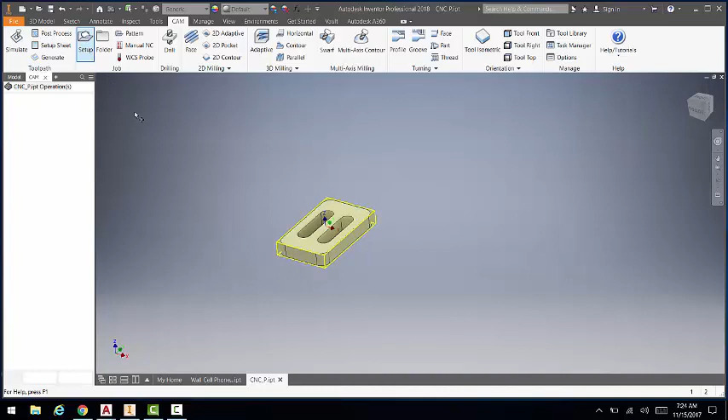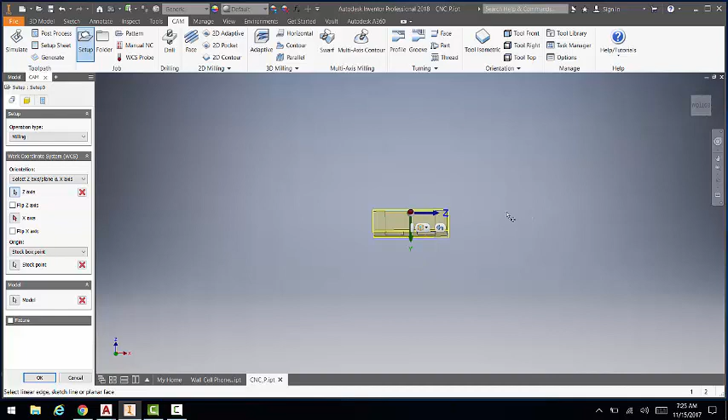Now, a critical part of this operation is that the way we CNC stuff, the bit is coming down from this orientation, so your Z-axis has to be pointing up. If your Z-axis for some reason is not pointing up like this, as you can see, now it's expecting the bit to come in from this side right here, and that's just not the way we're going to set it up. So to do that, first you're going to go ahead and select where it says Model Orientation.

You're going to select either one of these Z-axis options, and you're going to select any vertical line on your part. If it's upside down for some reason, you can just click Flip Z-axis, and then you have it there.

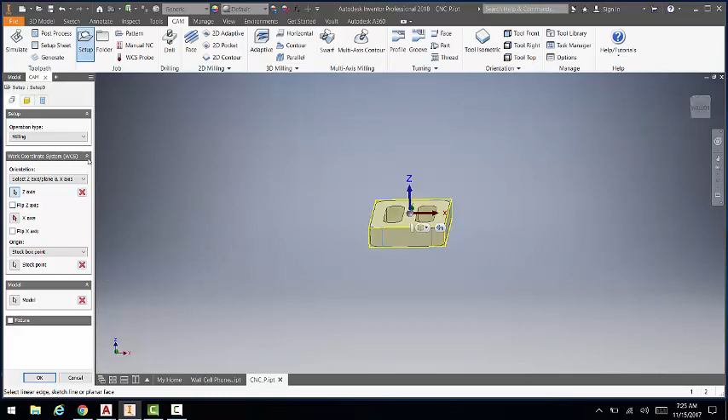In terms of the X and Y, it doesn't really matter in the computer. You just need to know what orientation your X and Y axis are so you know what orientation to put your stock into the machine. So for example, I'm going to put my piece of wood more portrait style as opposed to landscape style because of my X and Y axis orientation. My Y is going vertical, my X is going horizontal.

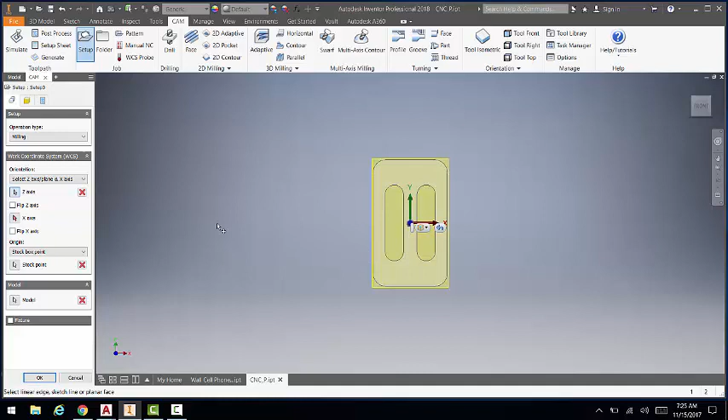Stock box point is our next thing. This is where you're going to tell the machine is 0, 0, 0. We're going to go ahead and choose - I always choose a corner, specifically a top corner. So this is where I'm going to tell the machine is 0, 0, 0, and then go ahead and mill from there.

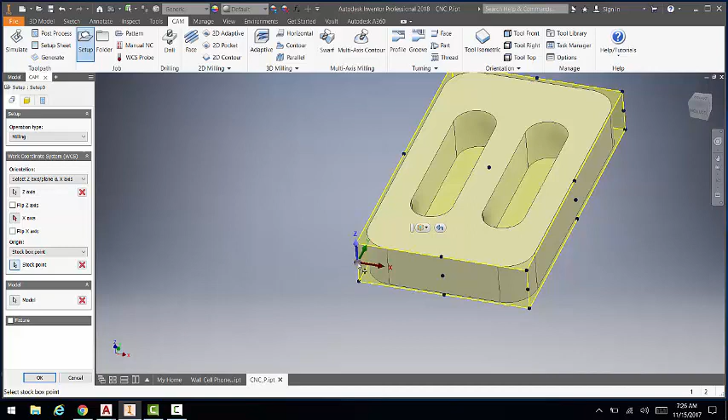Be careful you don't choose a midpoint. Sometimes it's hard to see, so you want to make sure you choose a top corner.

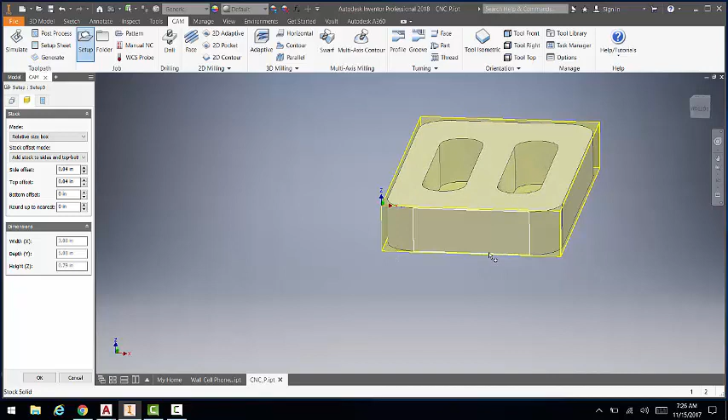Model should be selected already, so that should take care of that. Now we go over to the stock tab. We're going to do what's called a relative size box, so it's going to have a minimum stock around it. This yellow prism that you see here, that's the wood that you're putting in the machine, and this is what it's going to cut out.

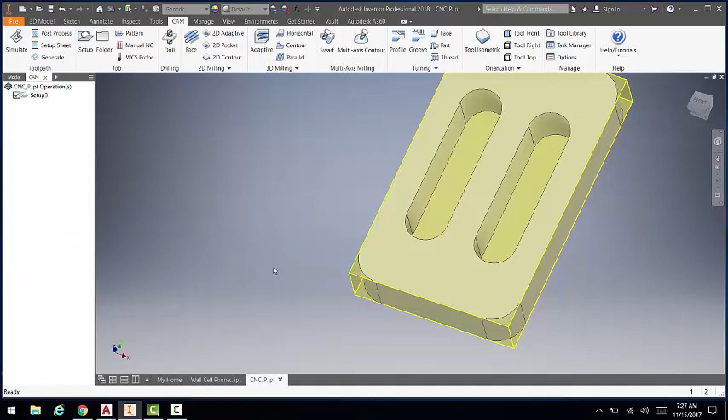We don't need any offsets, so I'm going to zero out all of those things. As you can see now, this representation of my stock is now the same size, minus some of the corners and stuff, as my model. Go ahead and click OK for that. So now what we've done is told the computer what size and orientation of the wood that we're putting into our machine.

The next setup is a pocket cut. We always want to cut out the pockets or the inside stuff before we do a contour or perimeter cut. If we did a perimeter cut first, this piece would already be loose inside the machine and there's nothing holding it down to do these pocket cuts. So in terms of orientation, our contour cut is always going to be last. I'll come up here to where it says 2D pocket.

Again, it's picking this as 0, 0, 0. The first thing I want to do is choose my tool.

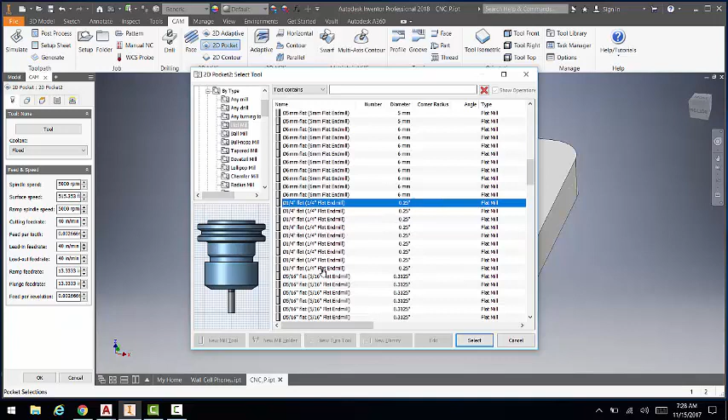I already had this set up, but we want to go ahead and choose a 1/4 inch flat. The easiest way to find this, because as you can see there's tons of different types of tools, is by type, then flat mill, and then you're going to scroll down until you find one of the many 1/4 inch flat mills. Just choose the top one, that would be fine - really any of them should do. There's very little difference in the different types of flat mills. So we'll go ahead and click select.

So now, as you can see, this is the profile of my cut. Now we got to do the feeds and speeds. Without getting too into this, the computer cannot regulate the spindle speed on our routers - that's actually done on the tool itself. In case you're curious, they're going to set it up so it's spinning about 25,000 RPMs. As you can see, that changes everything else that we have here.

What I want you guys to really worry about is the cutting feed rate, and some of these other options down here. The cutting feed rate is how fast our bit right here is moving through our stock. 60 inches per minute is pretty fast.

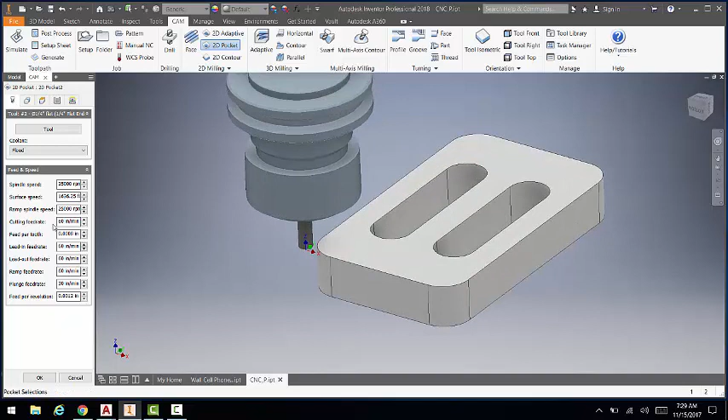We could probably get away with it with pine, but we're going to go ahead and turn that down to be safe, to 40 inches per minute. So it's going to move at 40 inches per minute across my stock as it's moving around. I want my lead-in to also be 40 inches per minute.

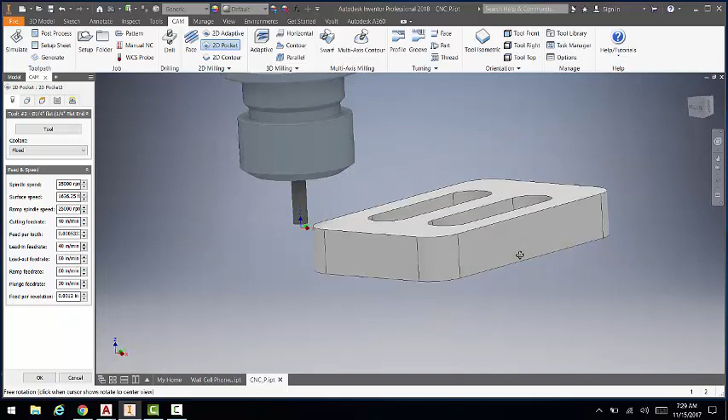If I was to show you a picture of this, my spindle is going to come down and feed in like that, then start moving around my stock. That lead-in is going to be 40 inches per minute, as well as it moving through my stock at 40 inches per minute.

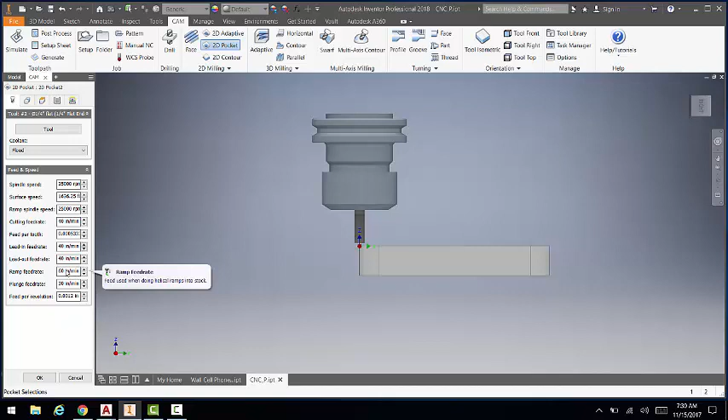Lead out is kind of negligible, but we'll keep it at 40. My ramp feed rate, you'll see this on our simulation, but this is when it starts to spin to cut out these slots. I'm going to take that all the way down to 20 inches per minute. And my plunge feed rate, although I'm not using a plunge on this operation, I'm going to change it to 15 inches per minute.

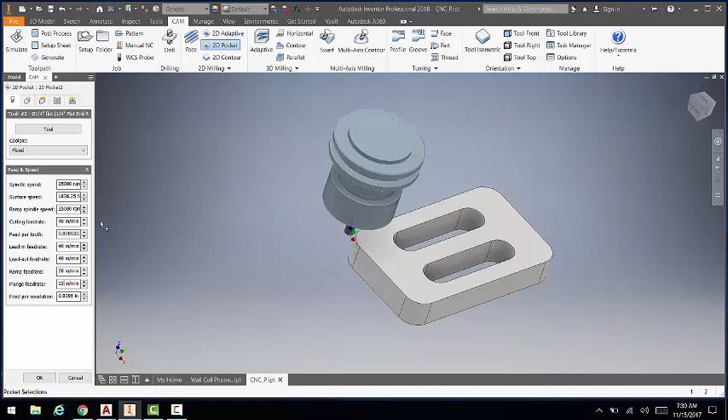All the other ones leave as the default. They're really not going to affect anything here, but you may want to write these values down for future reference. On to my next tab, geometry.

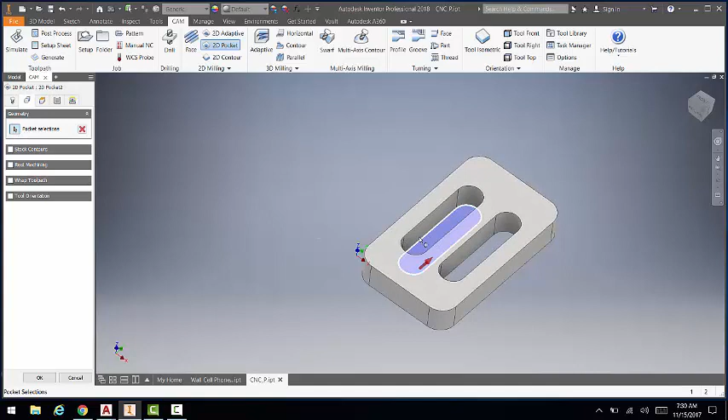So these are my pockets that I'm selecting. Since both of these pockets are of the same depth, I can go ahead and choose them both at the same time. Always choose the bottom edge of your pocket, and even your contour, always the bottom edge, and you'll see why that matters later. Also make sure that arrow is correct, since this is a pocket cut and I want to remove all the material inside of here. If the arrow is on the outside of your cut, just click on it to move it to the inside.

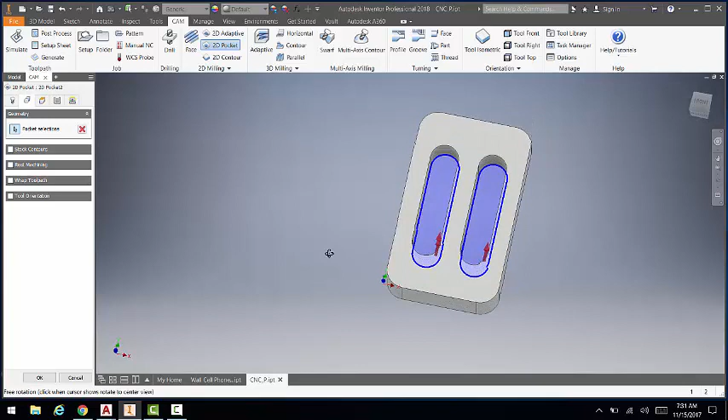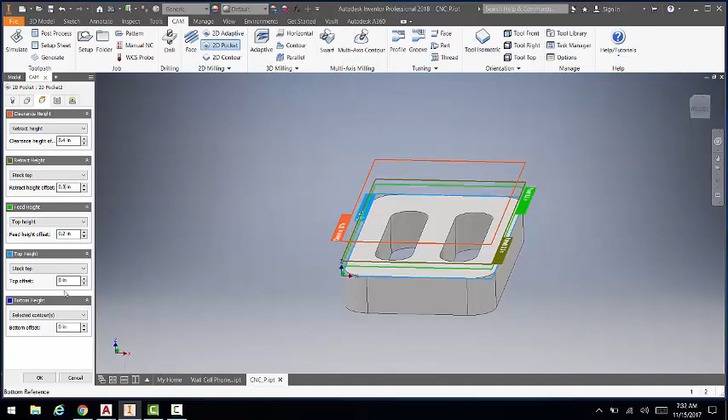We're going to adjust these a little to make sure we're safely moving through our part. My stock top, my retract height, I'm going to change to 0.3. My feed height I'll go ahead and leave at 0.2. My top height here for my stock top, this is where it thinks the top of my wood is in this case, so I'm going to change that to 0.1. That way my first cut just barely touches my part, so it's not diving into the part too hard.

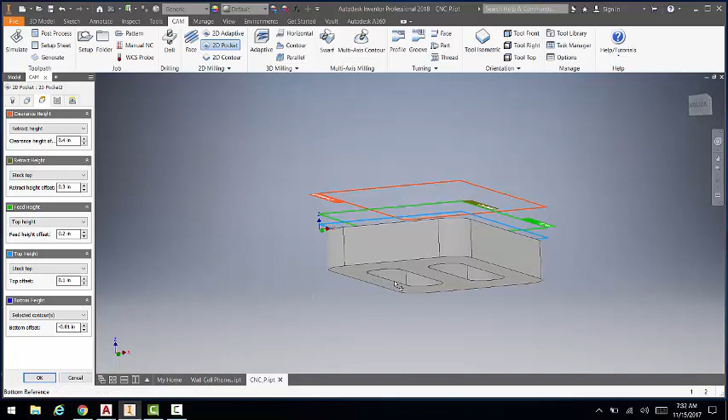And then my bottom, it says selected contours. If you remember back on the geometry, we selected the bottom edge, so it thinks that's our bottom, which is what we want. But just to make sure we get through the whole thing, we're going to put a negative 0.01 on there so that it cuts all the way down through the bottom to completely clear out our part.

Next tab, passes. A couple things here: uncheck stock to leave, since we don't want to leave any stock — we're going to machine it perfectly. Go ahead and check smoothing. If you look here, smoothing gives you a nice smooth arc when it comes around. I'll add a 0 to smoothing, and if you hover over here and read the box that shows up, it says to make smoothing and tolerance the same for the best operation, so let's add a 0 here as well.

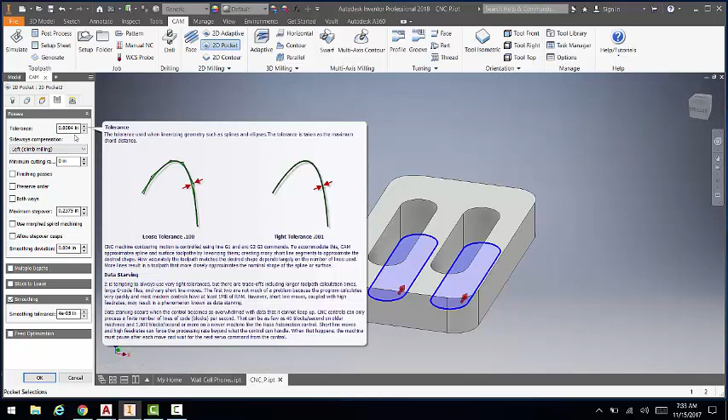Now, you need to have multiple depths. You don't want to plunge all the way into this and go around in one pass — you're going to incrementally take out wood. So I'm going to check multiple depths, and for us, our depth is going to be 0.1. So if this is 3/4 of an inch thick, it's going to take 7, or technically 8 passes to get all the way through, going down 0.1, 0.1, 0.1, and so forth until the very bottom, where it's going to take out 0.05 for multiple depths.

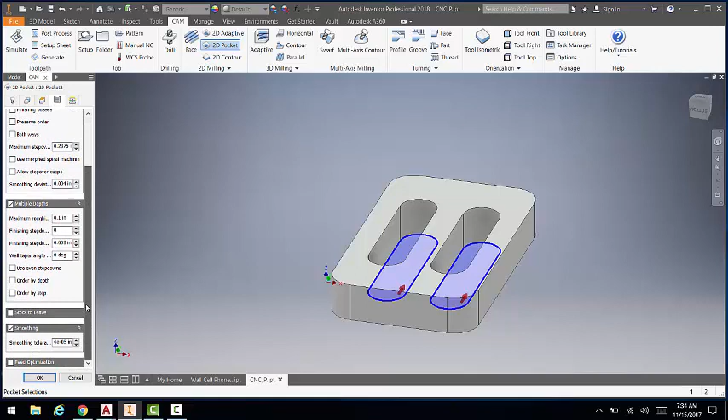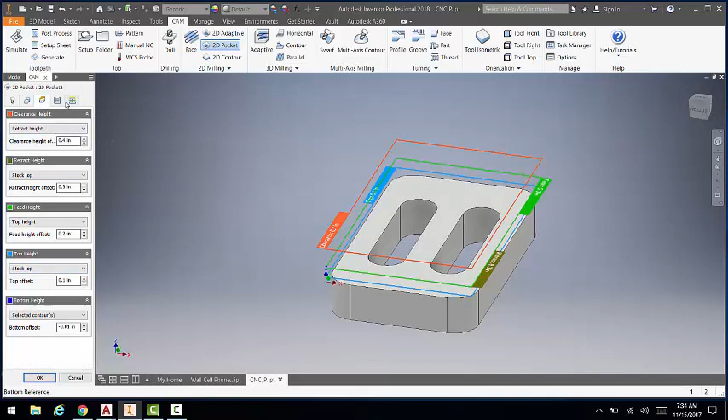Everything else we can leave the same. Let's go to our final tab here, and you want to uncheck keep tool down. This way, if we had that left checked, when it's finished cutting out this pocket and moves over to the next pocket, it would stay down and cut right across, cutting out your piece of wood in the middle. We want it to retract up to the heights we set previously, so it moves over to the next operation and starts everything there. All of this we can leave the same, and we'll go ahead and click OK.

As you can see, it's generating our toolpath. If you don't get a toolpath generated, you've made a mistake somewhere. If you look at this, it's going to start its plunge right here and then actually start cutting out. This is the feed rate shown here on these blue lines.

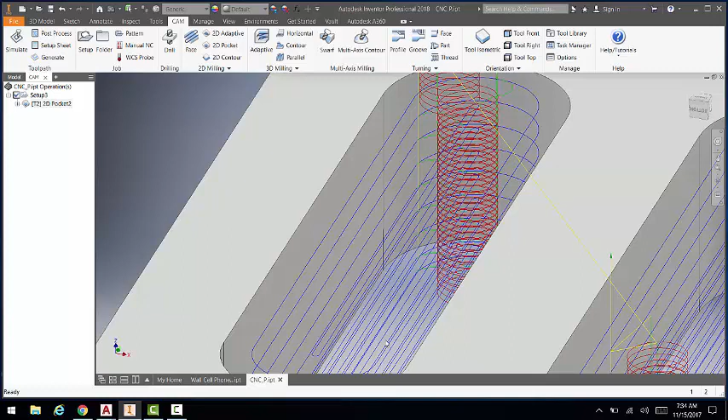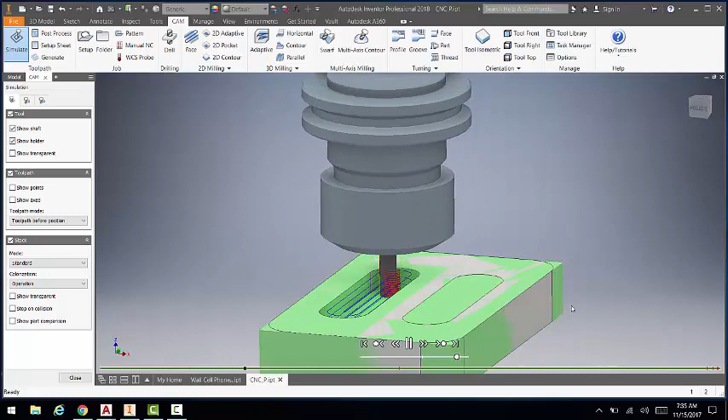I go ahead and right click and go to simulate, check the box that says stock, and go ahead and hit play, and you can actually simulate what this is going to do so you have an idea what you have going on here. By dragging this cursor, you can move it faster and actually see the stock going away.

Everything there looks good, about the way I want it. I'll go ahead and click close, and now I have to do my second operation, which is a 2D contour. Go ahead and select 2D contour.

The nice thing is all my feeds and speeds got saved. It just used the previous setting. This didn't though, so 25. Alright, now everything didn't get all changed. We'll go ahead and change this back to, this was 20. Oops. And this was 15. Alright, 40, 40, 40, 20, and 15.

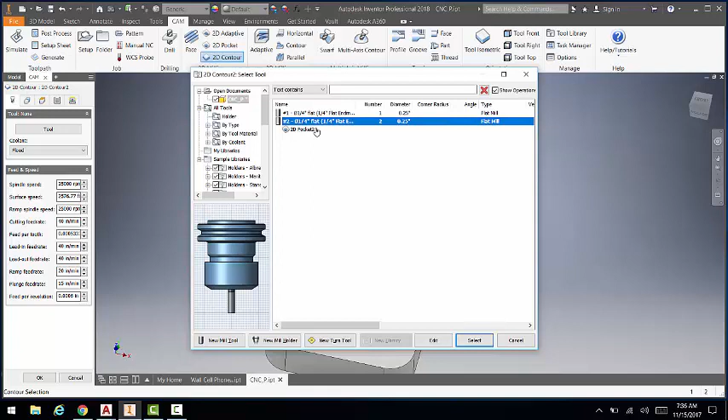Alright, my tool, I'm just going to choose my previously selected tool. I'm not changing the tool, so this is the tool that's used for the 2D pocket, so I'll go ahead and use it for this as well.

Next tab, geometry. Stock contours. Again, I want to click the bottom edge. I want to make sure that my arrow is on the outside of my part, so it's cutting it out. I don't want it to be on the inside of the part, outside.

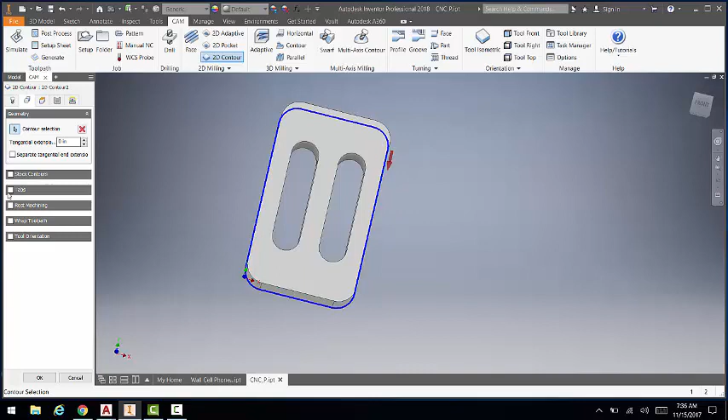Now, anytime you do a contour, you're going to cut it out, you need to have tabs. These are critical. As you can see in the picture here, it's going to leave these tabs in here so that it doesn't cut out your entire part, so that it's still holding down to the table.

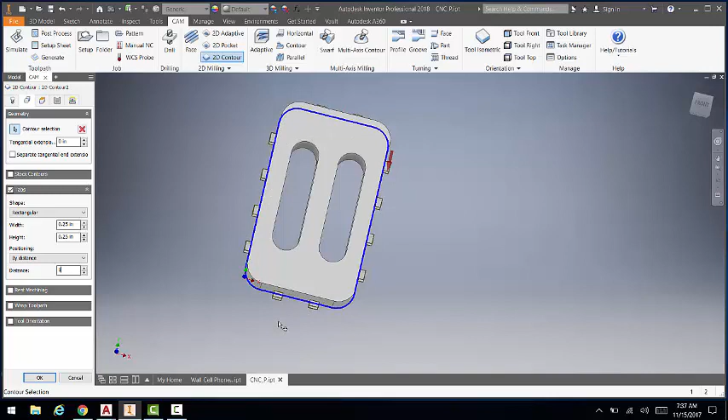That's a really thin tab of a 1/16 of an inch. I make them 0.25, and just for argument's sake, I'm going to go ahead and change the spacing to 1 so that I have more tabs going around. We'll take these off with a router. It's really easy, but you need to have tabs, and you want to make sure that you've changed the thickness of the tab so it's taller like that.

Going to my heights, again, just like my previous one, 0.3. Stock top, I'm going to go 0.1, and then bottom offset negative 0.01.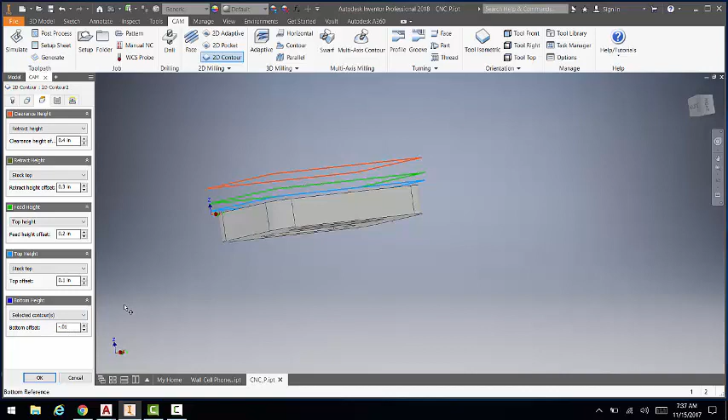Alright, passes again, make these the same, check smoothing. Oh, I can make that, okay, as long as they're the same, it's fine. That's probably a little too high. That's alright though.

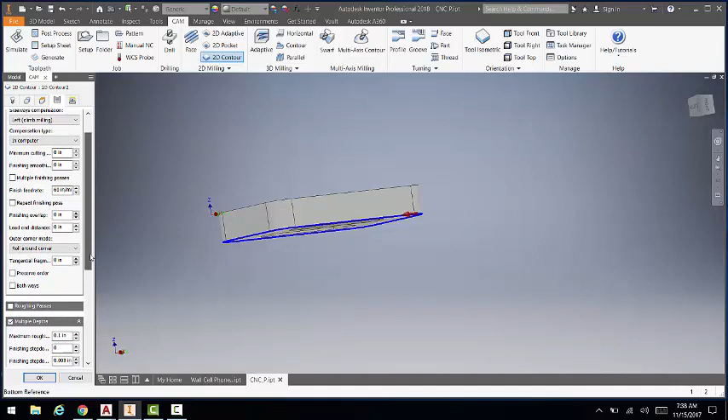Multiple depths, we always want to do multiple depths. Change this to 0.1. Everything else looks good. Final tab, again, make sure keep tool down is unchecked. Click OK.

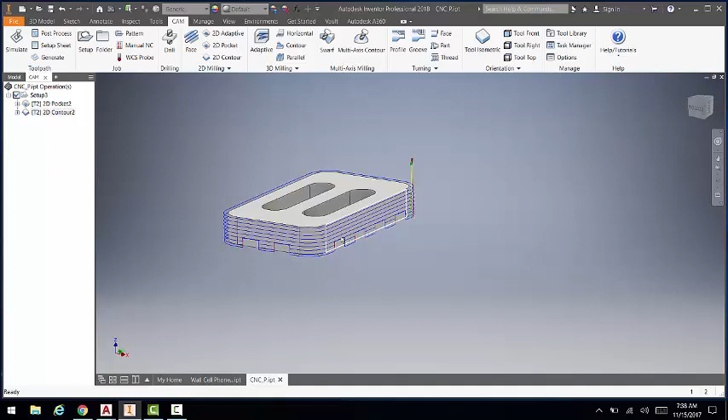So as you can see here, it's going to come around here, it's going to lift up and not cut out stock right through here. Alright, we're going to cut that out on the router later after it's all said and done.

I'll right click on it and go to simulate. I'll make sure the stock is checked. I'll go ahead and click play, and I'll move it down, and I'll show you. So if you see here, the router bit's actually picking up and not cutting out these tabs, and we're going to remove them on a different tool after the fact.

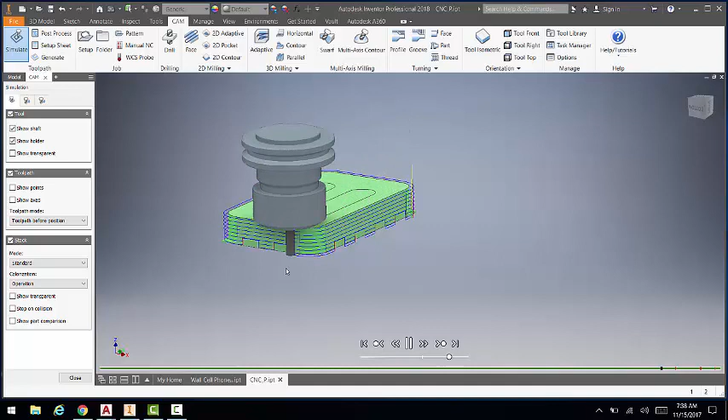Also notice that it's cutting just a touch below my stock. That's that negative 0.01 I put to make sure my entire part gets cut out. Go ahead and click close.

And now you're going to click on setup. You're going to right click on setup and you're going to go to post process all. This is where it's now going to convert this file that we just set up to G-code.

Let's see, this is, you can leave that the same up there, configuration. Post configuration, this is the language that our router uses. There's a ton of them. We use emc.cps. So this is the language that can talk to our router.

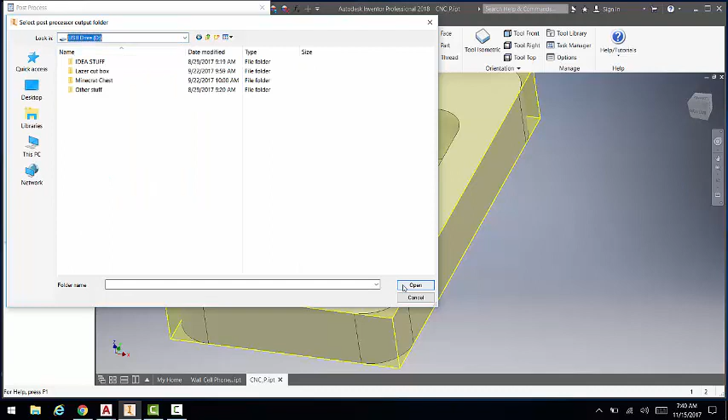It should end in a .ngc. If you don't have a .ngc, you don't have the correct file type. Project name, CNC practice, output folder. You're going to need a flash drive for this. So I'm going to go ahead and have my USB drive selected. And then this is the file name it's going to save in there.

I'll go ahead and click post. That's exactly what I want. Click post. And if you give it a second, you're going to have a bunch of lines of code show up. You want to make sure that you have, these are all the coordinates right here. This is our G-code, all the coordinates that's going to go through as it cuts out your part. As you can see, it's almost 3,000 lines of code.

So everything there is looking good. You don't need to save this, it's already saved, just close it.

One thing you can do that's kind of nice, if you go to simulate and if you hover on this part down here, you can kind of get a time for the total run time on my part. Let's see, I got 11 minutes for my slots and then 3 minutes to cut the whole thing out. So I'm going to be about 14-15 minutes to go ahead and machine all this once I hit play on the machine.